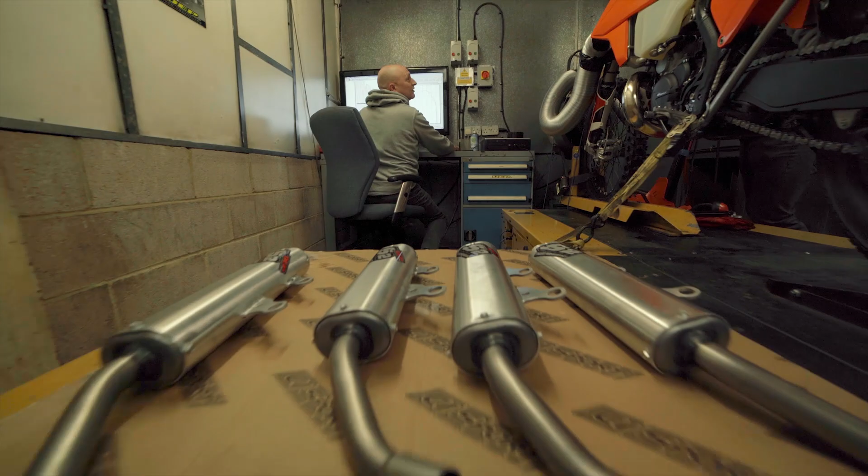We've run through the exhausts and the silencers here at DEP. Big thanks to DEP for letting us use the dyno and back to back some of our findings, some of the things that we wanted to try. We've managed to make some improvements on the bike, on the dyno, which I will be taking to the track and hopefully reaping the rewards or feeling the benefits.

I did say personally for myself for the KTM 300 that I would like it to have a little bit more of a hit, just because of my motocross background, I suppose. I know that's not for everybody, they like the linear curve, but I just felt that for the 300 I'd just like it to be a little bit livelier.

It's been compared with the 250, and the 250 does feel a little bit lighter because of the engine inertia, and does have a little bit of a different power curve. So the 300 obviously is quite a smoother, broader power curve, and I just like to add a little extra spice to that.

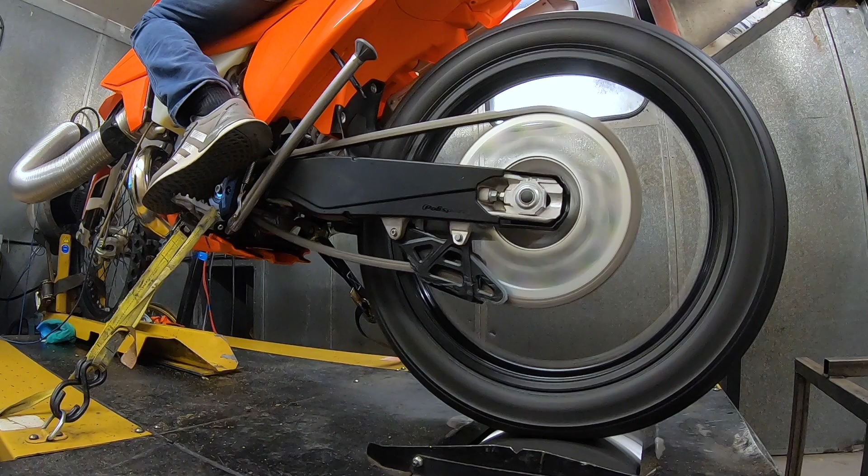It's really good when you spend some time on the dyno and you find some brake horsepower and you change or alter the power curve, and that's exactly what's happened today, so I'm pretty excited.

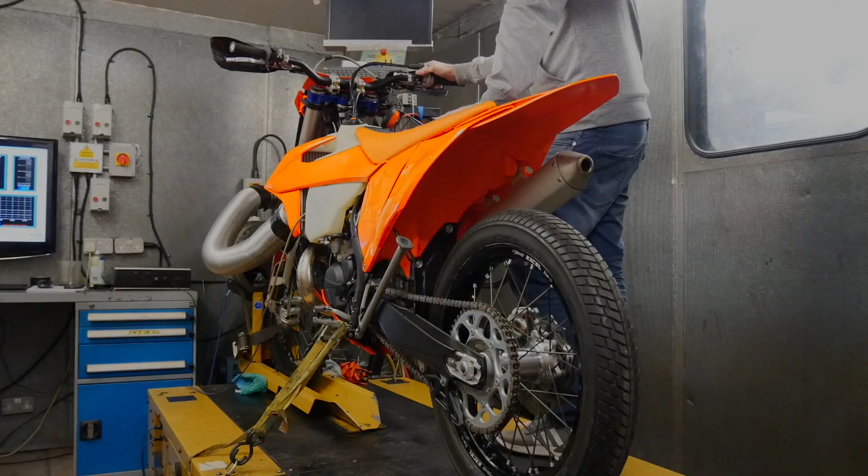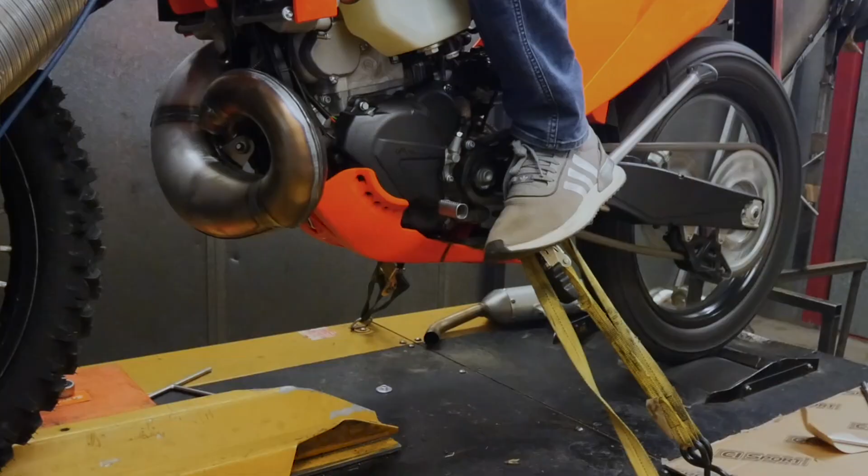Today we've spent a bit of time with the KTM 300 EXC TPI. From working on a dyno up at DEP, we've tried some different pipe systems, some setups, some different silencers. I'm not going to go through them all, but I'd like to go through some of the best ones and show you how your bike can be transformed with an aftermarket pipe.

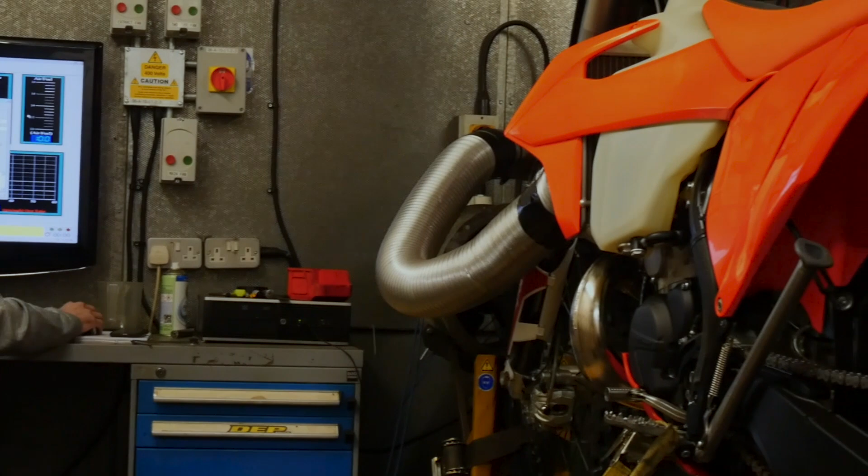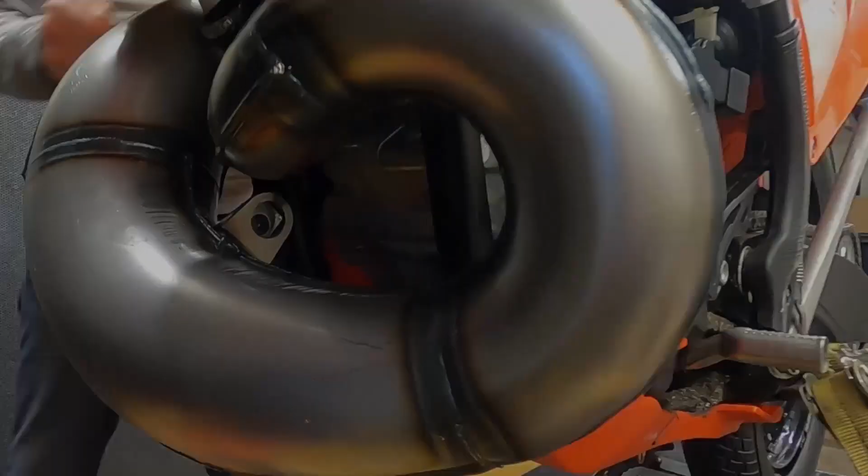So first of all, we ran the bike straight up in standard form, so standard silencer, standard front pipe. After that, we put the DEP front pipe and DEP silencer on, which is sold in stock form. Stock bike, stock pipe. So that's what you're buying off the shelf.

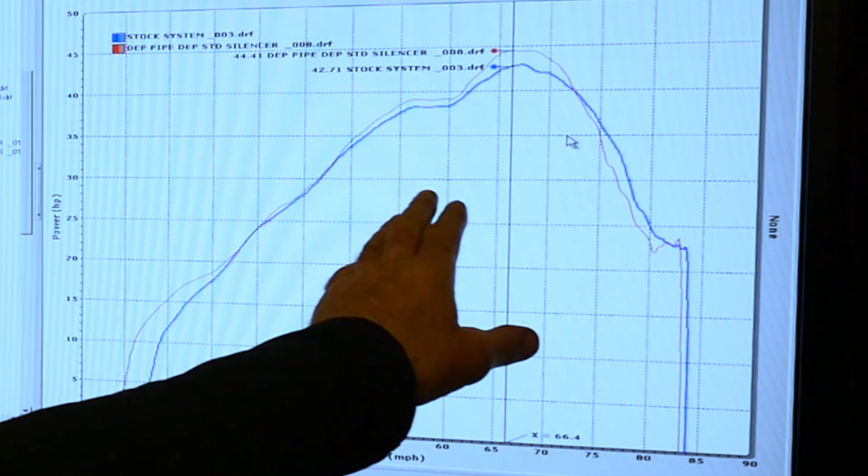I hope you can see the difference there on the red line. The experiment took place on the same day, same temperatures, one after another, putting all the different silencers on. We tested 4 silencers in all, but I'm only going to show you 2 of the DEP exhaust systems.

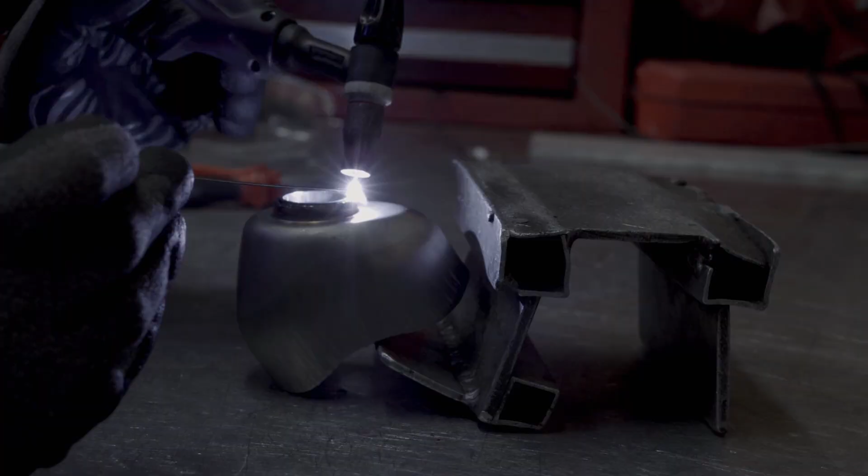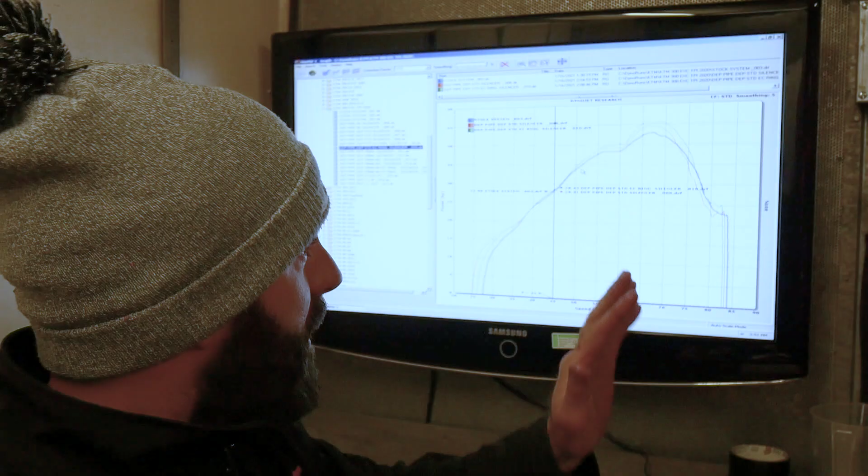Now this is the same silencer, same perforated core that you can buy. The only difference is that it's got the ring in the end of the silencer. The reason I want to point this out is because that ring actually plays a big part in the power performance. I've noticed that a lot of people like to just grind that ring out. Please don't. Because if you look here, it's the green.

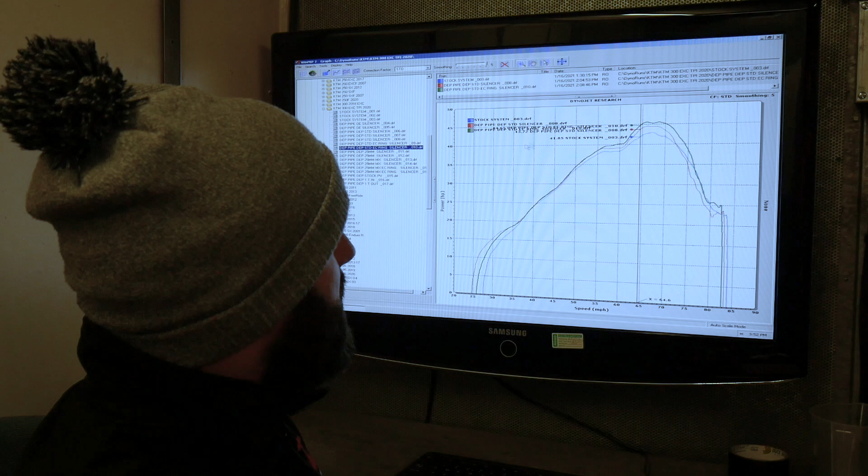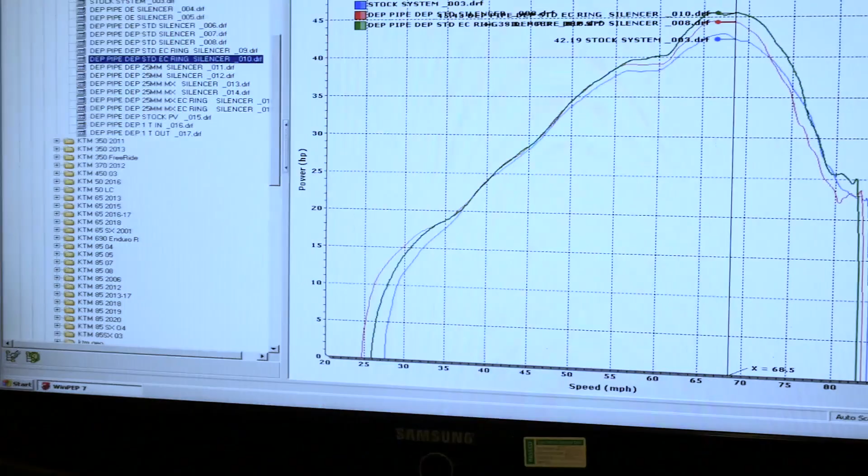That's the benefit that actual ring gives you. If I just move this cursor, if it wants to play ball. If we look there, blue, red and green. I'll zoom in just a little bit for you on that, and move the camera up. Bear with me, I'm working on my own. So you can see the difference.

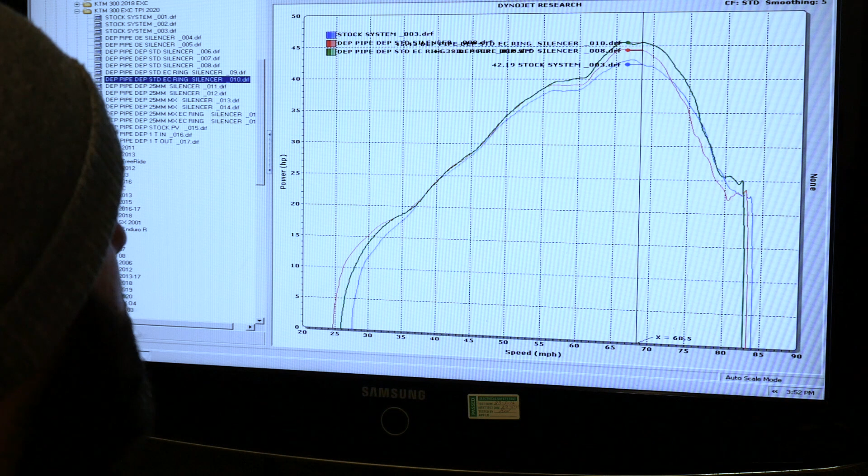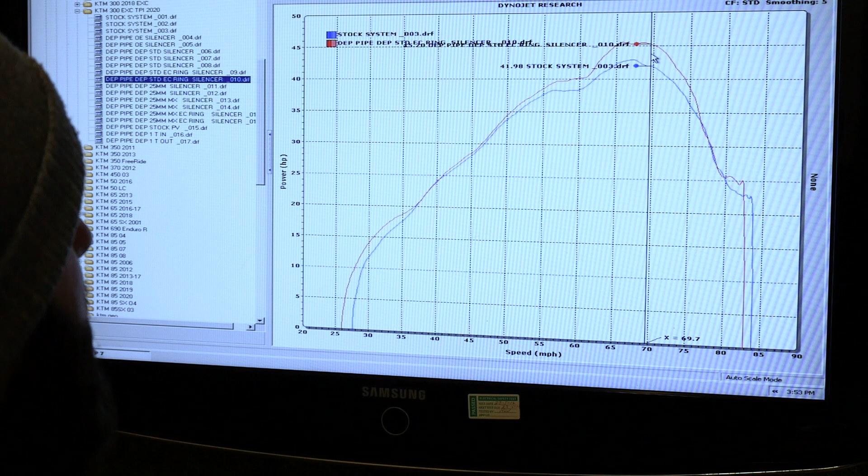Now look, green is with the ring, red is without the ring, blue is stock. So there is a massive overall power difference. If I just remove all of these runs and go with the stock, there, you can't see the numbers clearly, but that says 45.2 brake.

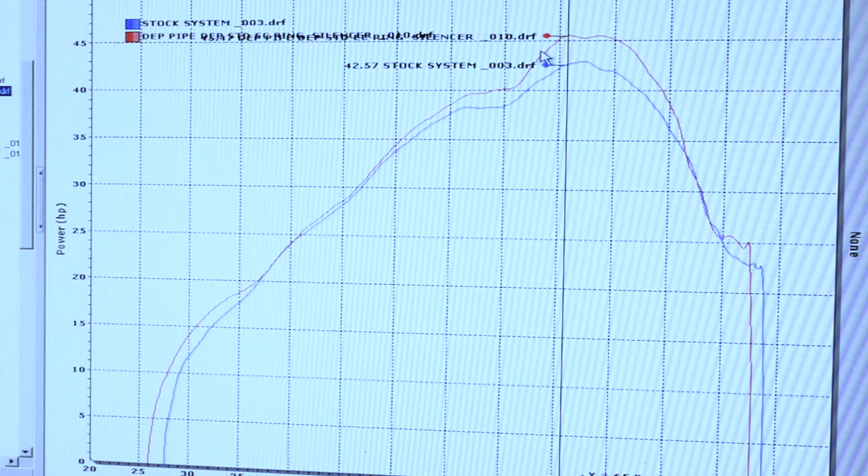And the stock there is 41. Well, we'll say it's 42. Okay, so that's a massive power increase and a massive gain. If we go here, it's reading 45.47 over 42.57. So there's the difference between a stock, which is blue, and the DEP exhaust system, complete exhaust system this is, with the ring silencer.

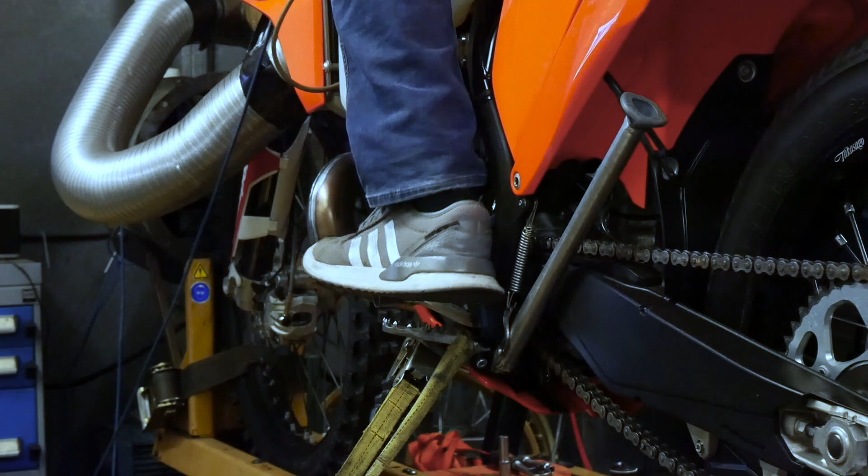So as you can see, it's a huge gain all the way through the power curve. So it really does benefit if you keep that ring in. It's extra work at the DEP factory for the guys to put the ring in, and they put it in for a reason. It's not to restrict the bike, it's basically to give you an advantage when you're riding the bike, and as you can see there is a big advantage.

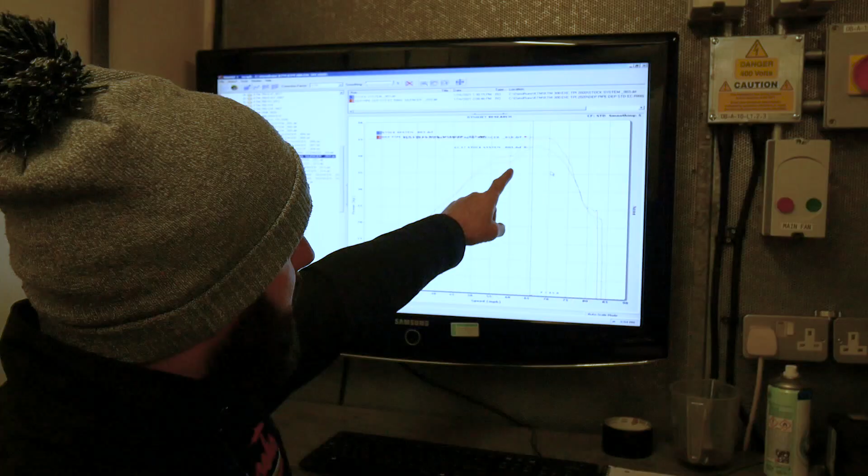I'm just going to lose the green dyno run for a second. If I just remove that, and we go. Again, there's the difference when you take the ring out. So red's with the ring and blue's without. So yeah, that in itself is pretty impressive.

But today's been a good day. It's been one of them interesting days where I've learned a lot. Where I can go out now, on the track or out in the woods, out on the enduro course, and figure out a few things inside my own head whilst I'm riding. And I've been on the dyno for many years, and I pretty much know by looking at the dyno what I'm going to like or what I'm not going to like.

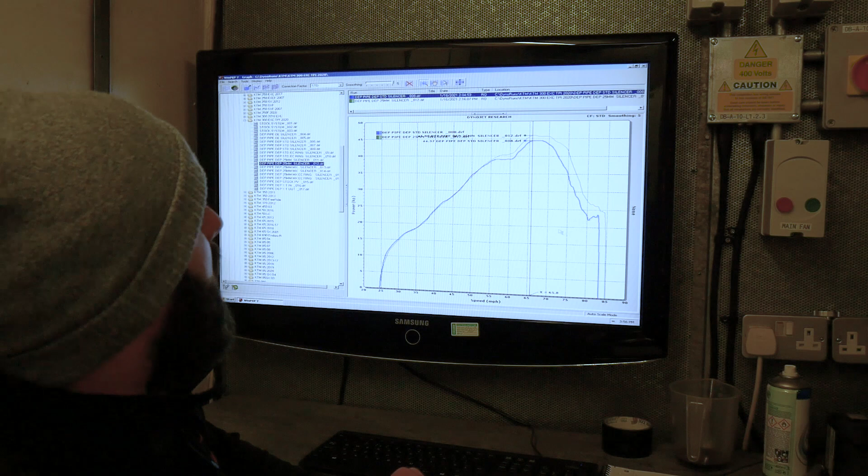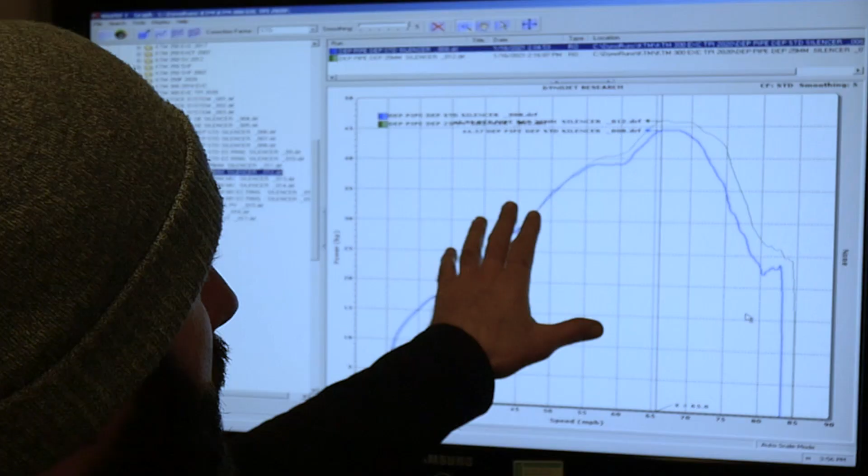And if I just show you this, the new silencer which is going to be coming available very soon is here. So if I lose the red one just for a second, I'll add that back in a second. So you've got the standard DEP silencer and exhaust pipe. Well, I say standard, you've got the system that you can buy at the moment, which is blue. That's without the ring in it. So for the guys that are grinding out the ring, that's what you've got right there.

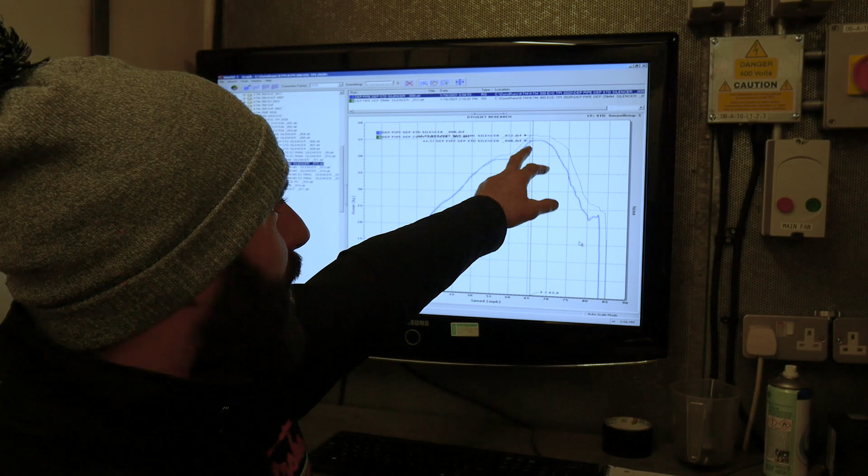The green one is the new silencer which is coming out. So it's the same exhaust pipe on the front, but just with the new silencer. So I'm quite looking forward to getting out and testing that. There is a big power difference there. So when you're going out on the motocross track, you're going to be needing that because you're going to be riding quite high up in the RPM and you want that extra power.

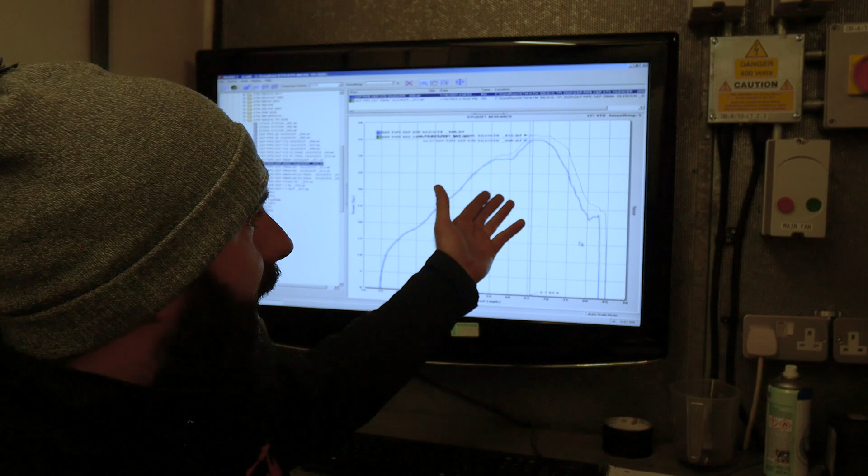It's not to say that it's going to be great when you're riding through the trees or woods or over rocks. We're not saying that, so that's why we've got to go and test it. But we pretty much know the blue one anyway, I've been out and track tested these many times, and I do like that. So that's good. So we'll get to that, and I'm really looking forward to reporting back my findings once we're outside getting dirty on the bike.

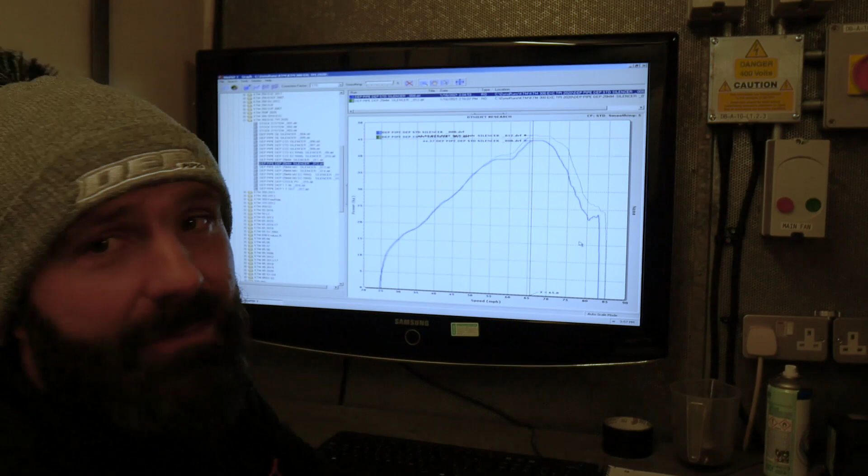But seeing things like that definitely puts a smile on your face. It's definitely a win-win, because there's nothing worse than spending some time on the dyno and actually being underneath, which does happen. And the only way that you know what works is by knowing what doesn't. We're winning.